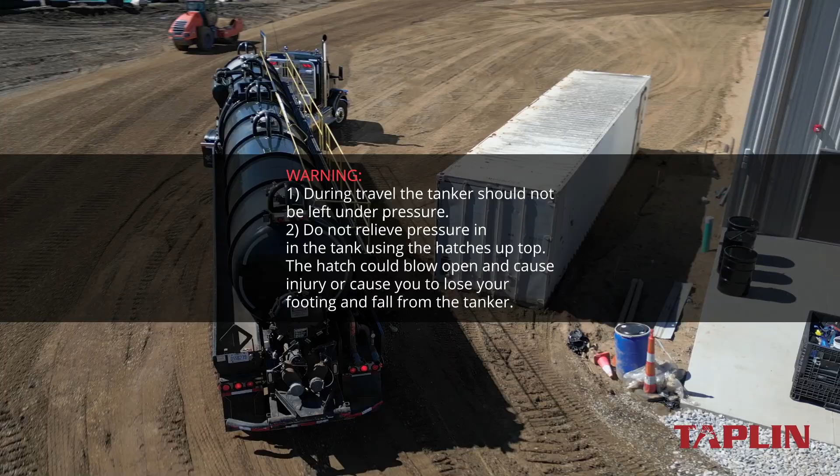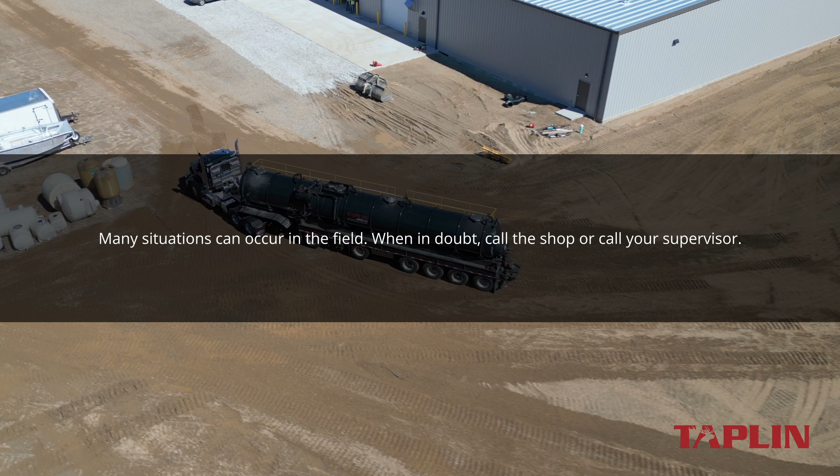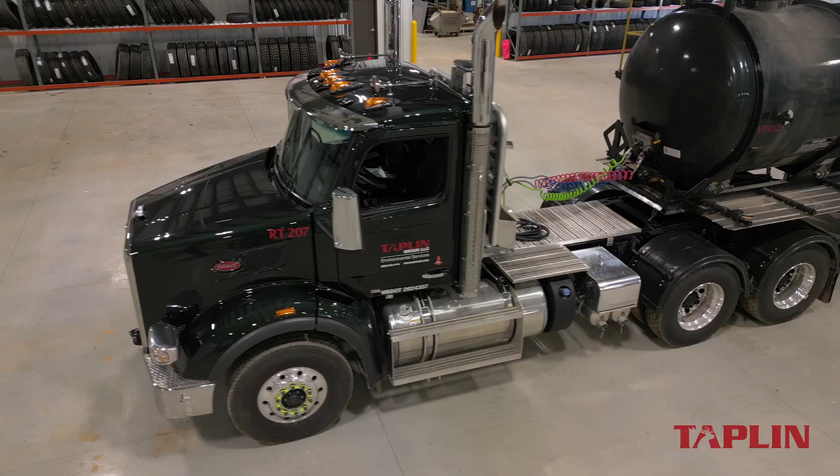So here we are, we either pulled in or backed into the disposal facility. Some disposal facilities will allow you to keep the vacuum or the truck on, others will actually shut it off. So just keep in mind that if you run out of air, that'll play a big part of disposal, especially with the air valves.

So some of the issues that you want to look out for when pulling into the disposal facility, unloading and loading, first and foremost is be aware of your surroundings. Disposal facilities tend to have hoses or other equipment laying around. Make sure you have a clear line of sight, a clear path when you're backing up the equipment to be safely offloaded. Also, if you have to blow off the equipment or provide vacuum to the equipment, make sure all your connections and hoses are hooked up correctly, and they're free of leakage.

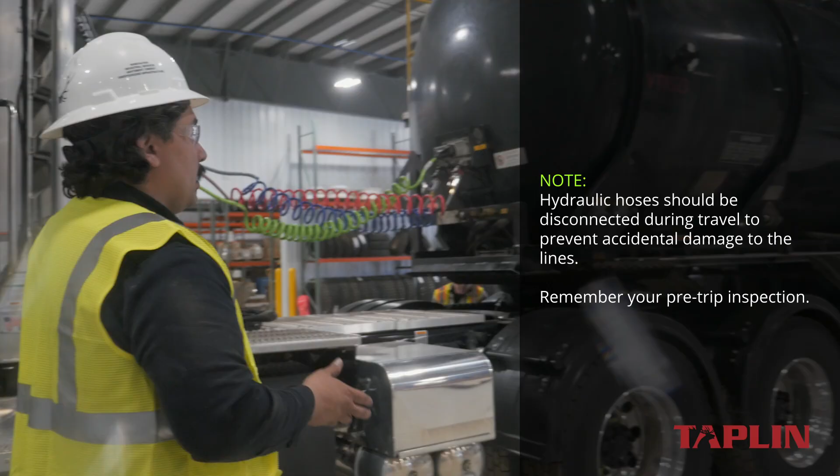Pulling in and pulling out of the disposal areas, just be patient, be calm, and know that you can correct as many times as you need to, as long as you're doing it safely.

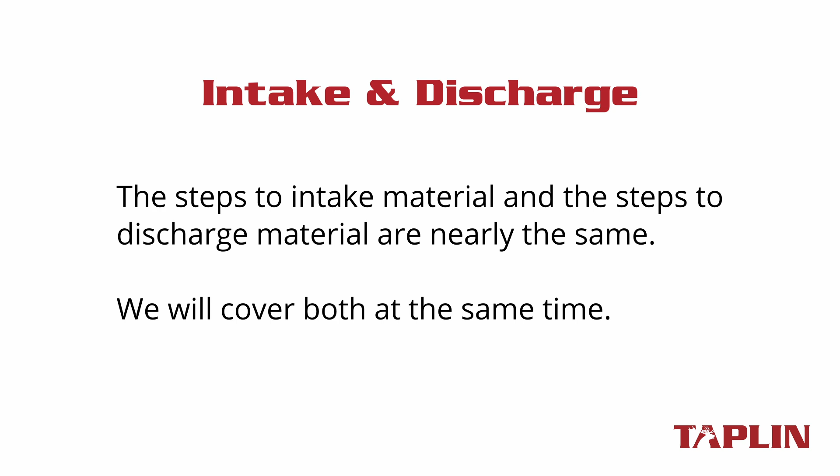In the back of the truck, you have an inlet hose and a discharge hose. The inlet hose is used to basically vacuum up the material, bring the material into the tanker. The discharge hose is basically meant to offload or discharge the material. When you're traveling with a load, your over-the-road valve will be closed at all times. This will keep any liquid from free-flowing back into the main vacuum system.

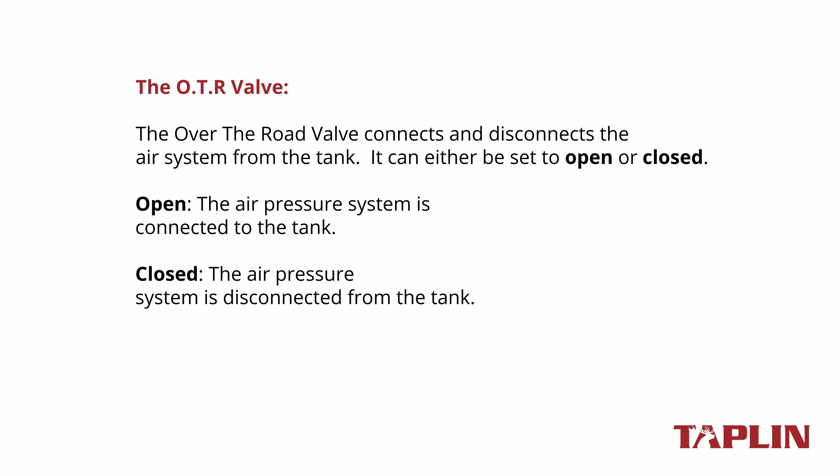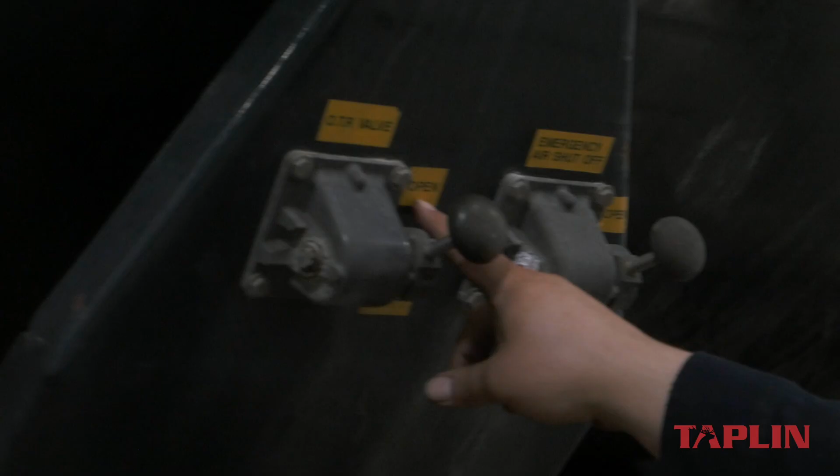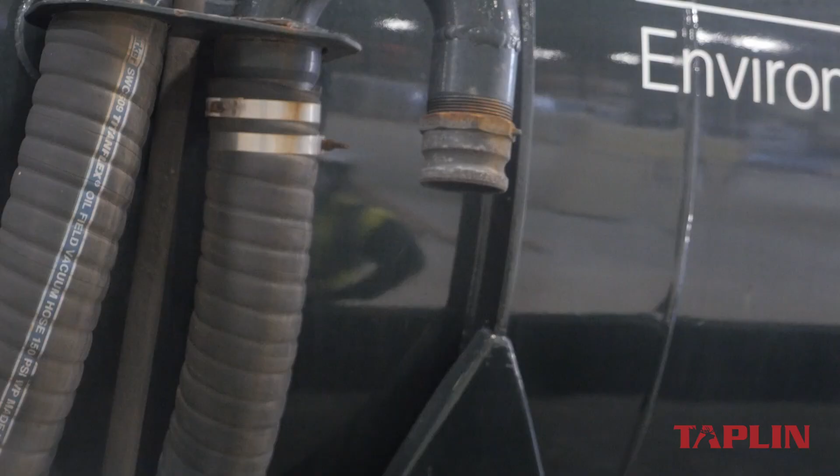Once you're ready to offload, you open the valve. Your vacuum system, you got P for pressure, V for vacuum, and of course in the center is neutral. You have the P for pressure, V for vacuum. So if you don't really know, that's pressure, that's vacuum. They both have stopping points. So in the middle will be neutral. You'll realize this once pressure gets released from the tank. When the pressure gets released from the tank, there's a breather, or you'll hear it and possibly feel it get released.

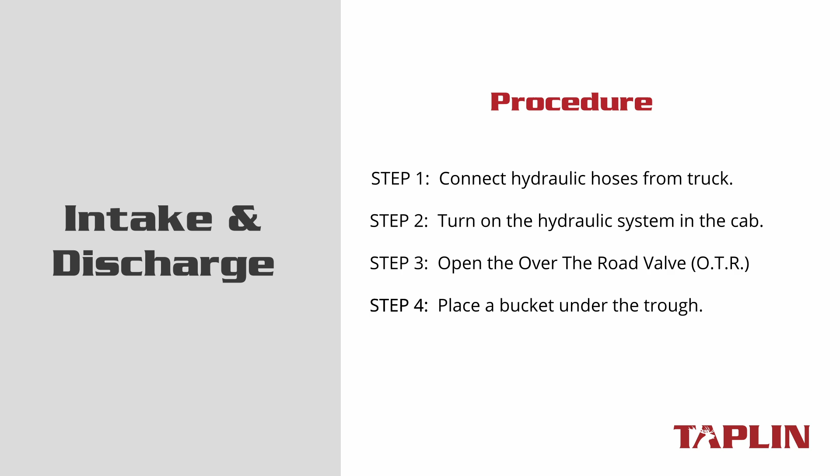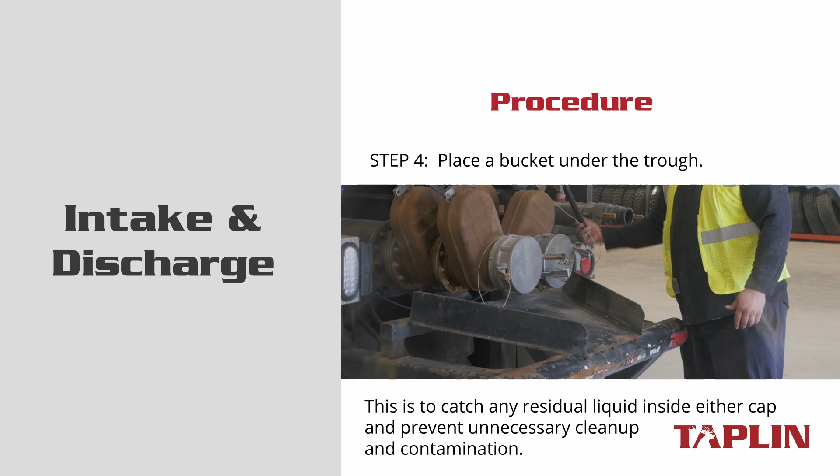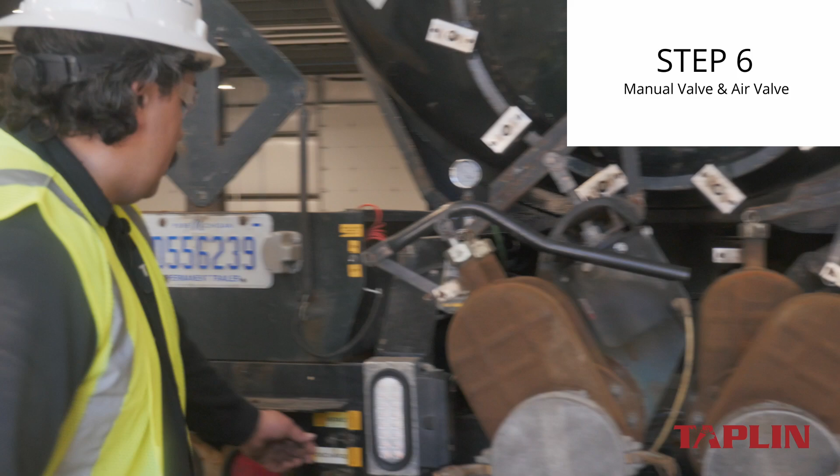Whether it be 6-inch hose that you're gonna run out to, if you're in a pit, or you gotta reduce it down from a 4-inch to a 3-inch, you're gonna take the corresponding adapters, hook them up to the discharge point, and then once you get the approval from the disposal facility personnel, you're gonna go ahead and open up your air valve and your manual valve to start the discharge. Opening for discharge, and then you have the discharge, which are labeled on the truck, discharge and intake, air valve. So they both open, and then right then the material starts flowing out.

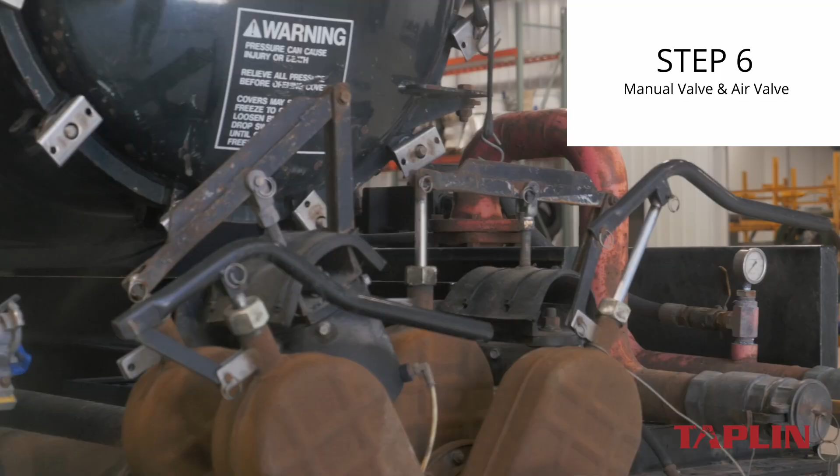When you hook up your discharge hose, ensure it's a good discharge hose, whether the one you supply or the disposal facility supplies. Make sure it doesn't cause any leaks. If it is leaking, ensure that you're over a controlled area that'll still lead into the disposal area.

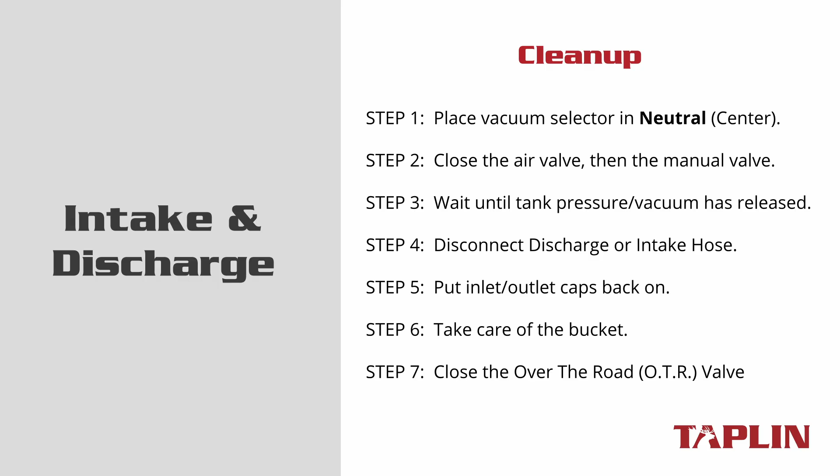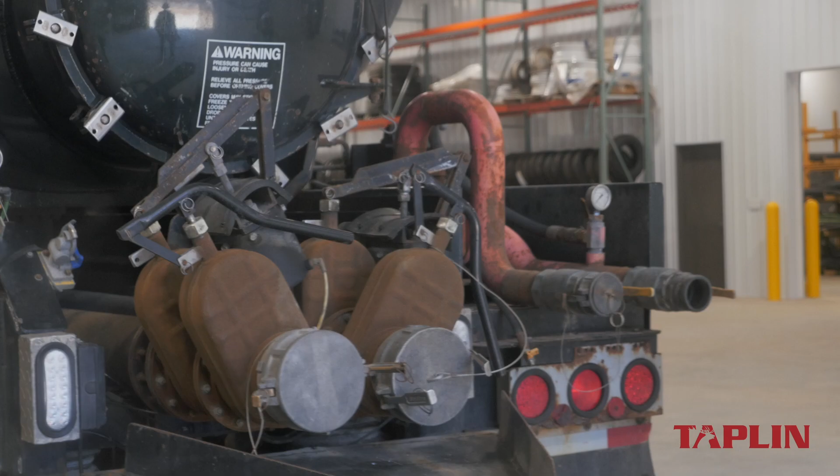The valves are open and the discharge is complete. What you're gonna do is request to have your tank washed out. Some disposal facilities provide a water source to you. For other ones, ask them to make sure if they have one that you can be washed out. If not, it'll come back to the shop.

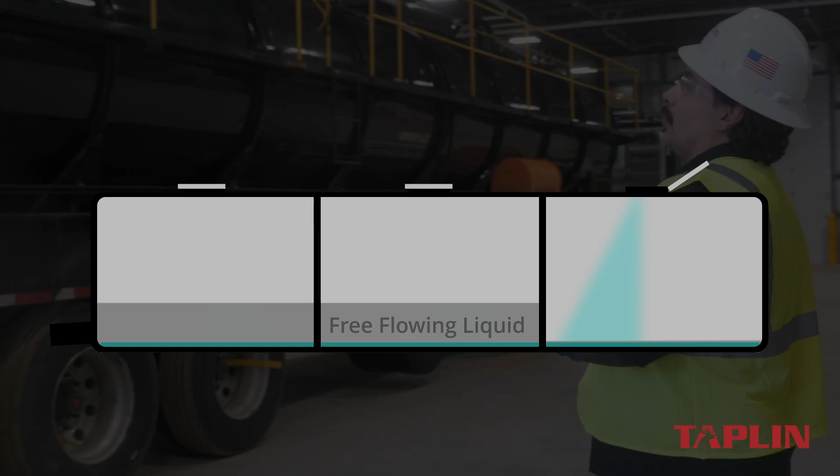If it's free flowing liquid and it can be moved quickly, you can start from the front and work your way from the front to the back because it's not gonna be piling up. However, if you have thick material that will pile up, you always wanna start from the rear of the tanker closest to the discharge point so that we can clear the discharge line, freeing it of any obstruction. Then you move to the second hatch. You wash from the second hatch to the first hatch, and then you come back and wash from the first hatch, continuing on all the way to the fourth hatch, third hatch, second hatch, first hatch.

What you're doing is pushing that material down and giving it a smooth surface to make the clean out a little bit easier. An important note: if you are offloading and you already have the discharge valve open and pouring it out, if you want to open up the hatches to get a start on rinsing down the tank, make sure those ears are not fully removed until you can tell that the hatch is loose. There could be built up pressure. If you go to release them, the hatch could pop open on you.

If by some chance it needs to come back to the shop to get washed out, a vehicle clean out sheet or form needs to be filled out, also known as a VCO.

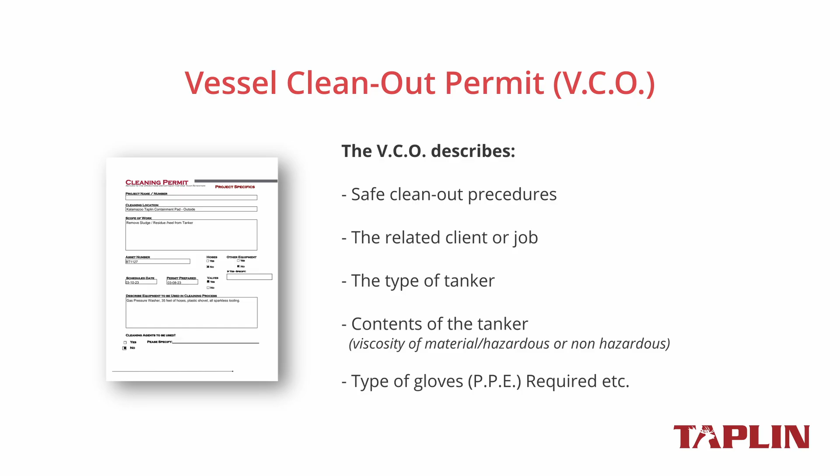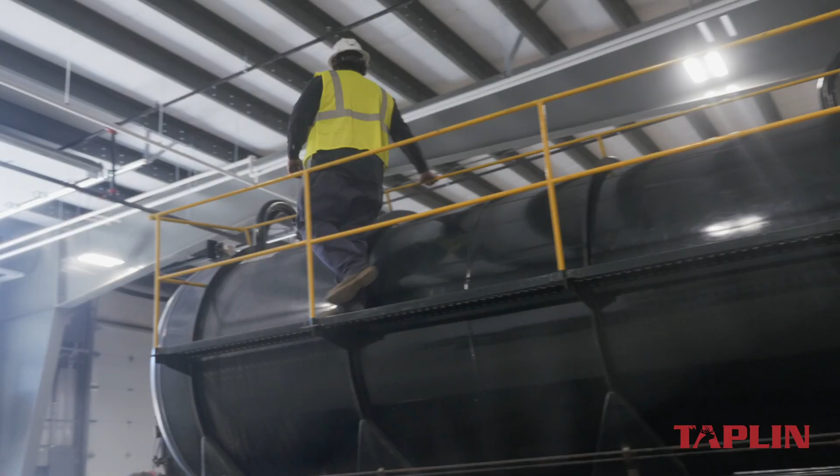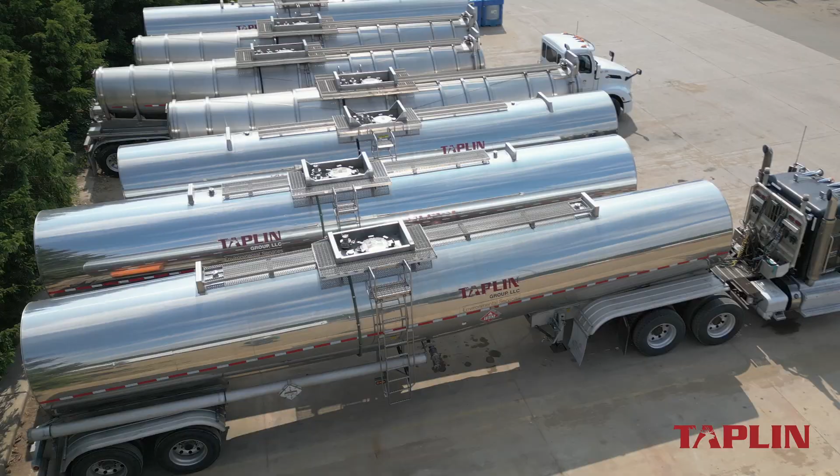This particular tanker has side rails, so you don't need fall protection or a lanyard to catch you. The side catwalk is very narrow, so you've got to watch your feet. Make sure you don't trip while you're up here and twist your ankle. Stainless steel tankers do not have a rail or foot rail, so at those tankers you will need to have fall protection, a harness on at all times when you're moving on top, to keep you from possibly falling.

Once your clean out is complete, close the valves, disconnect the hose, and then the disposal facility personnel will give you the okay to pull out.

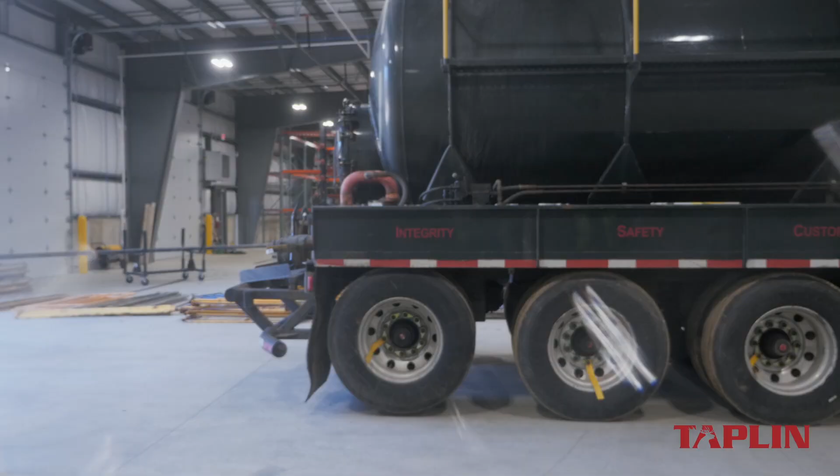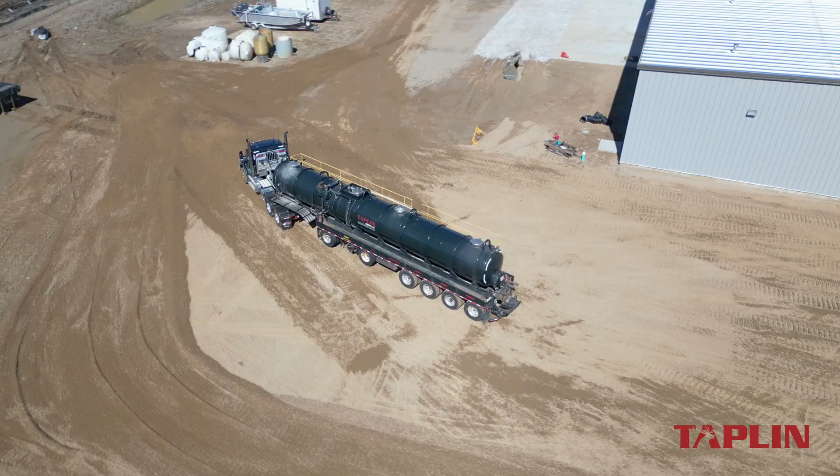So once the material or liquid or whatever disposal material is loaded onto the tanker, keep in mind when you're traveling down the road, it will make a sloshing or pushing and pulling sensation on the tanker. Baffles will help minimize that, but you're still gonna feel it, especially in the winter time. Take that into consideration, because the last thing you wanna do is have that surge of liquid or waste push you through a stoplight or pull you back when you should be shifting. The baffles help, but don't solely depend on them. Still act accordingly, still be aware of your surroundings.

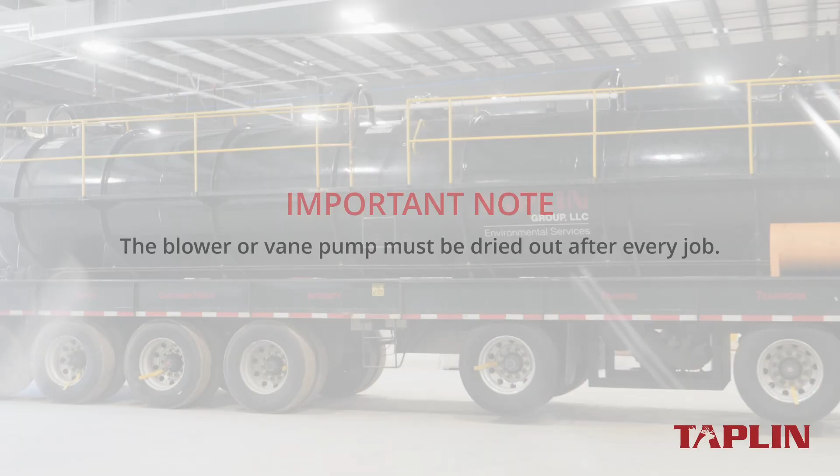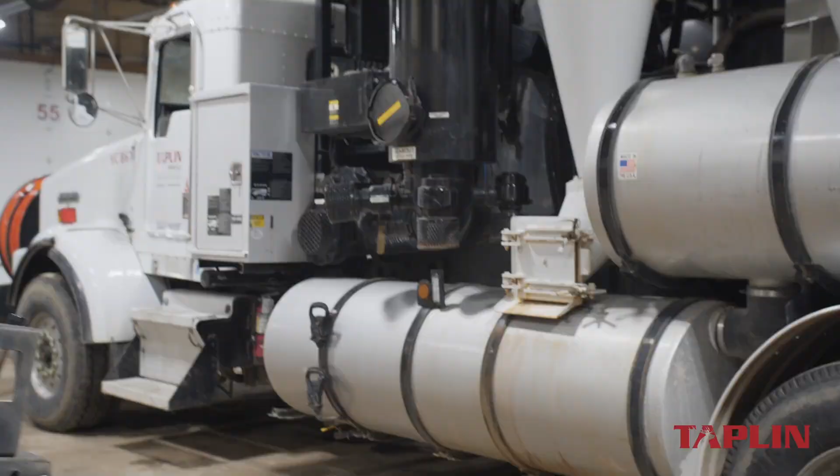Make sure you dry out the moisture because it can cause corrosion, it can cause rust to form, or even frozen materials that get caught during the winter time. There are two types of systems. You got the vane pump and the blower. You got to make sure you drain out the secondary moisture trap, which is located close to the blower or vane pump system.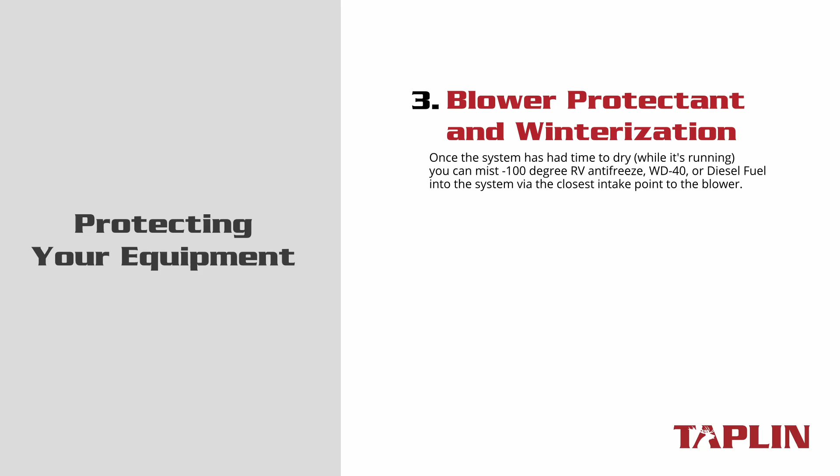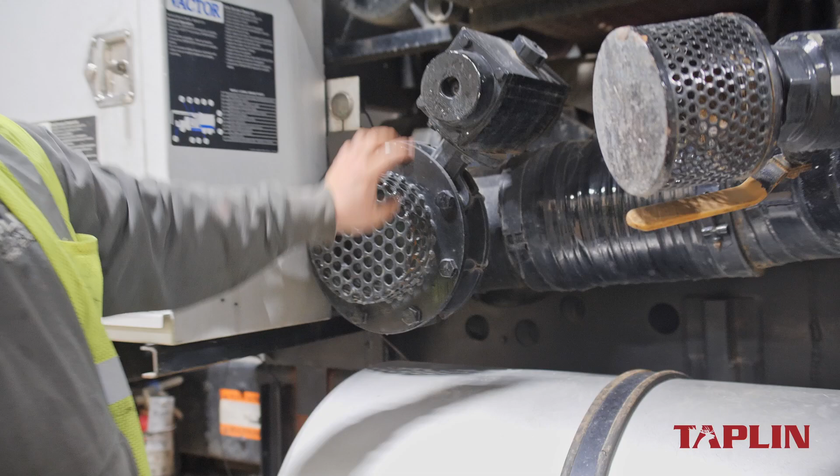You put these into the system, you don't want to just throw the water in there. You want to put it in a spray bottle or a Hudson sprayer or a handheld sprayer, just something you can spray and mist 6 to 8 ounces of material through the line so it can coat the system. Always dry out your blower.

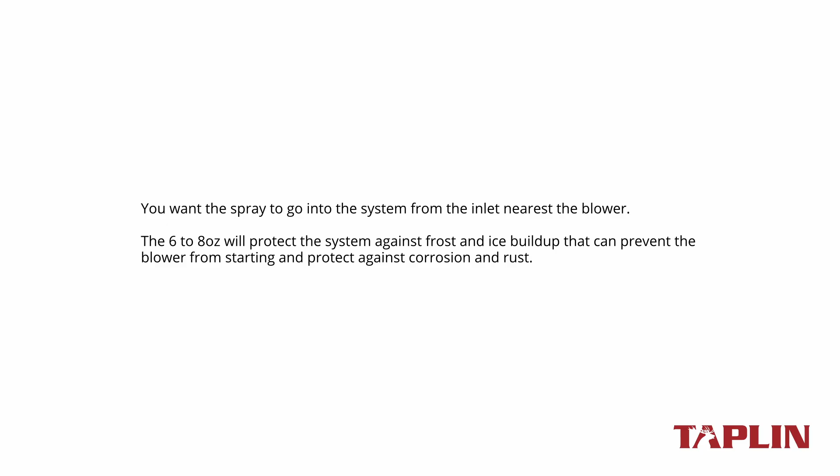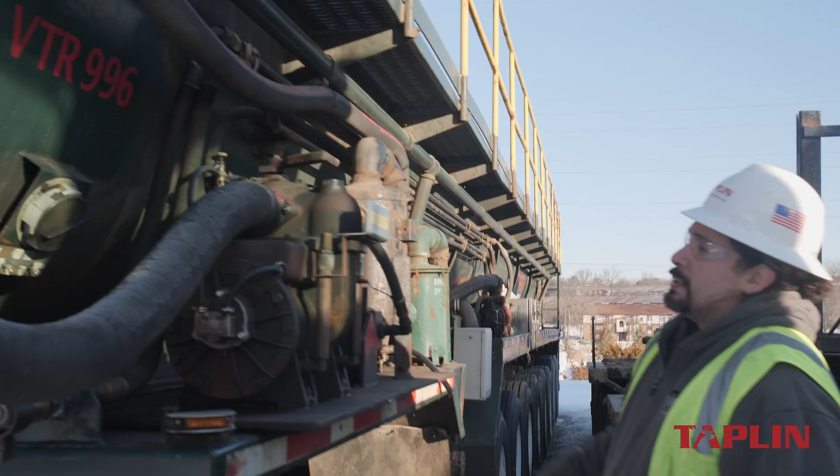If these procedures aren't followed, it can lead to damage to the equipment, postponed projects, time delays, and time and money to get the issue corrected or fixed. If you don't know, ask. It's important. Communication is key. It's always better to ask and find out the right answer than assume you can figure it out or assume you know the right answer and an incident occurs, damage to property, injury to yourself. Always ask. Communication is key.

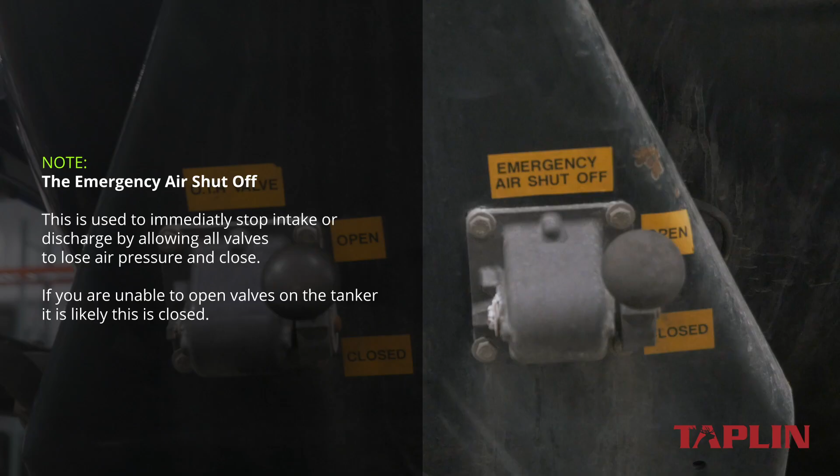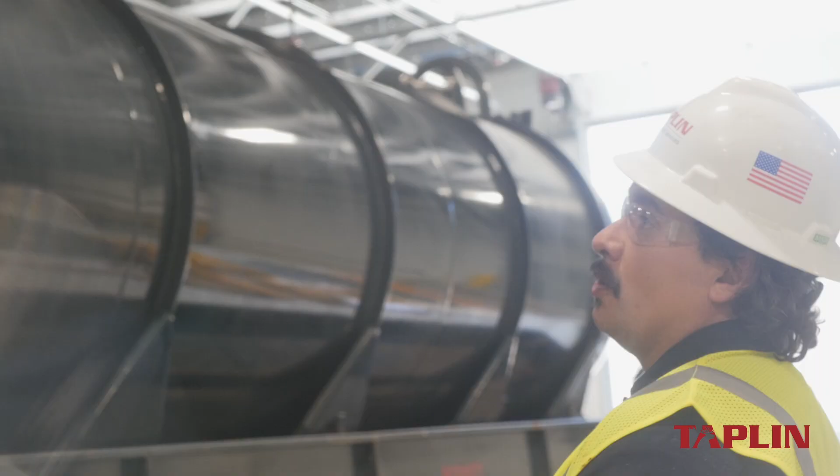Different tankers are different. Some tankers have 3 hatches with a baffle in the center. For those, if we had to wash them, we'd have to wash the center, wash around the center, then go either to the left or to the right and wash that towards the center, then go the opposite direction and once again wash inward to make sure they're clean. Some other tankers only have 1 hatch and a discharge at the end, so you have to reach as far as you can to the front and to the back.